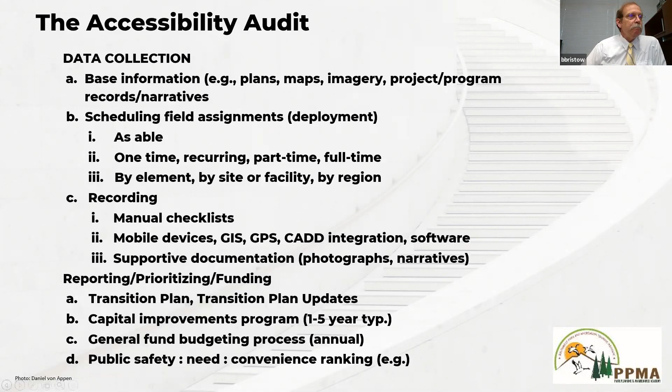Tools of the trade. This may be review for a lot of you, but maybe I can offer a few ideas that are new. I don't know.

A measuring tape, a metal straight edge - I like having a metal straight edge along with me on all my audits, especially when I'm the only one doing them. It's kind of like the old survey crews, which used to have 3 people: a rodman, an instrument person, and somebody taking field notes, but it's all one person now. If you're the only one doing an audit, it's good to have a rigid, straight metal edge with a measurement on it, like a yardstick, so you can lean it against whatever you're measuring and it'll stay up. It's kind of hard to do that with a measuring tape that wants to curl back in itself.

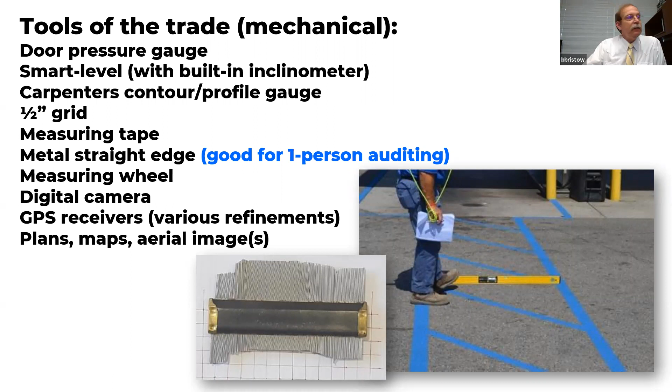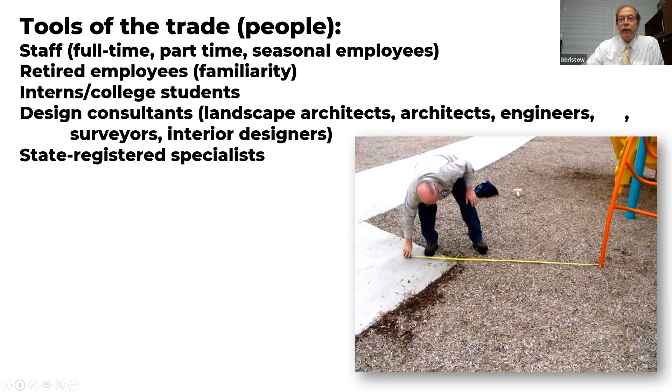As far as staff, can we use full-time people, part-time? Do we have a volunteer base to draw from? Do we have park interns? All these are legitimate forces that can be used in auditing. Auditing doesn't take a whole lot of training, but it does take the ability to have a keen eye, to put oneself in the place of somebody who's in a wheelchair or has another disability and think the way they do. That's the main thing in training, along with how to use the tools and the ways of gathering and recording data. Can you use retired employees? Sometimes they'll come back and help out. Finally, you can use consultants in the private sector and state-registered specialists if your particular state has that license.

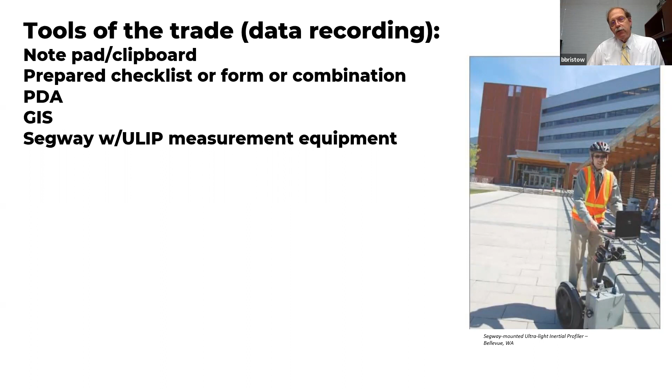There are some other items, just the tag-alongs you have, like notepads and so forth. This picture shows a city of Bellevue, Washington staff person riding on a Segway. This is definitely the apex of auditing - they use it for auditing their sidewalk systems, walkways, and trails. It has a built-in profiler, all digital, that feeds information to a computer, measuring slope, width, surface irregularities, and a lot of information. That's really for the forces that have a lot of money.

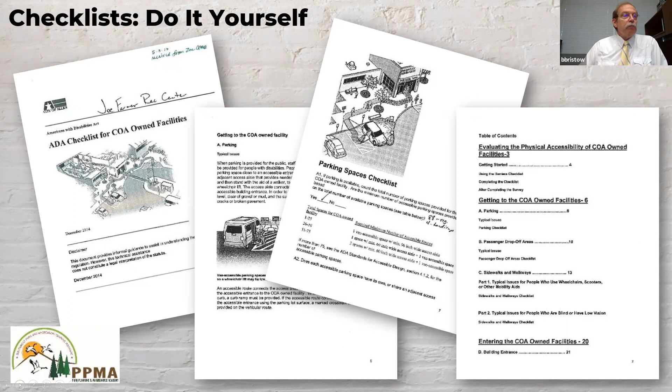I found one in California on the internet that I think is really good - it's the ADA cheat sheet. As mentioned, you'll get a copy of this presentation. I like this one just because I'm a visual person, and I like diagrams and dimension lines that show me in 2 dimensions what I'm going to be looking at or what I should look for. I think the Building in California group - I've included a resource link to their website - is a good example of a checklist that, although not interactive, is very thorough and easy to understand. It's a good one to look into as an example if you want to update your own checklist or auditing procedures.

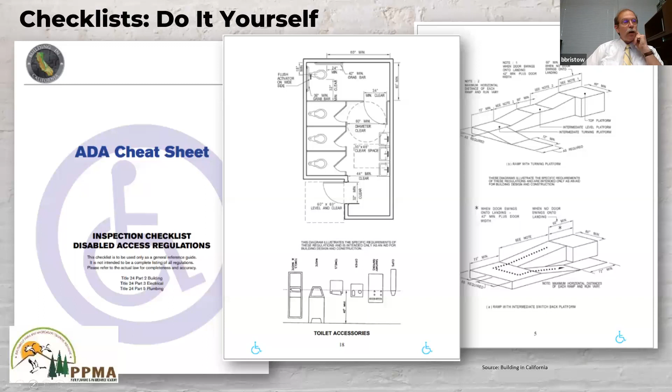There's another resource put out by the Institute for Human-Centered Design. These are copyrighted documents, but they make it clear on their website that you can use and reproduce them as long as you don't charge for them. They're a very good asset for auditing.

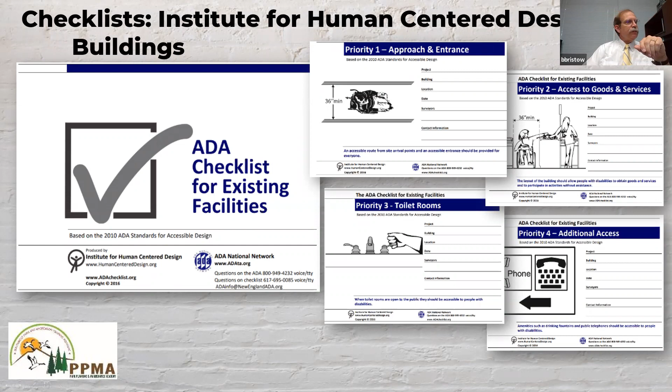They're very thorough, and the main one is the checklist for existing facilities. On the left side, the checklist library they've developed is broken into different sections, called priority sections. They've also developed a set for recreational facilities.

If you go to their website, these are available to download, print, and use. I like them. I think they're a good start in terms of the information you use to audit, what you record, and how it's organized. Organization is a big key to auditing and recording, as you know if you've done it.

It also allows you to put photographs into the auditing checklist forms, and gives you diagrams out of the ADA standards with an explanation of the dimensional, technical, and scoping requirements—scoping being what we're auditing, how many are required, and what is required. The technical requirements like dimensional qualities and clearances are pretty well covered too.

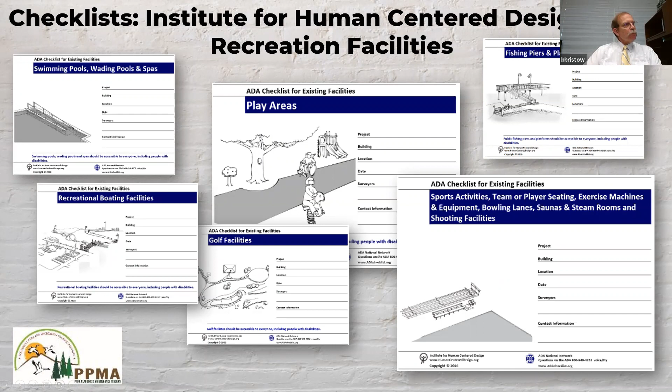The checklist that, to me—I wouldn't call it perfect, nothing's perfect—but the checklist I'd like to have when I'm out auditing, and that we'll probably develop when we update ours for the next transition plan update, is one that prompts the person or user to investigate.

I wouldn't say it inspires them, but it prompts and motivates them on what to look for, and may encourage them to think like a disabled person. It clearly tells them what to investigate, either through diagrammatic explanation or short verbiage—long narratives can be cumbersome and time-consuming in the field. Training can take care of a lot of that pre-audit work, though, and lessen the need for that.

Personally, I'd like to see a map in our checklists—something like a site plan or floor plan for whatever I'm auditing, that allows me to pre-plan, follow along while auditing, trace my steps, and use it afterward to reorient myself if needed. As you'll see in one of the facilities I'll show later, it can be easy to get distracted or lost auditing a complex facility with many moving parts. A map or reference to keep with you is a really good tool.

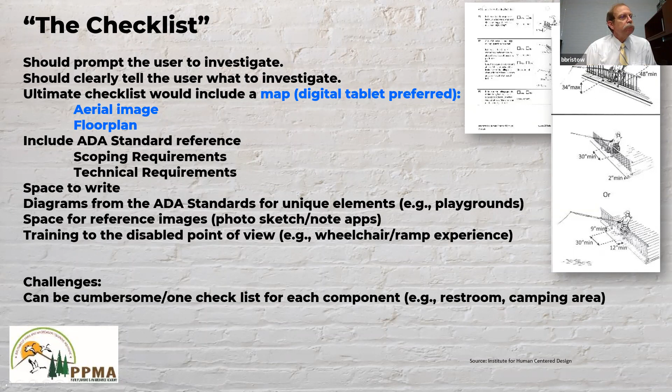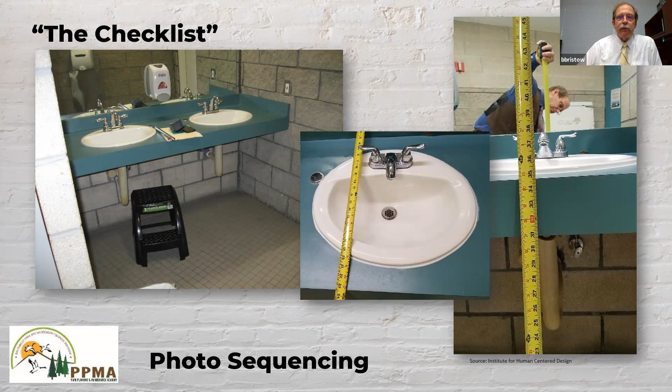Photo sequencing to me is important. Taking photos is, in my opinion, the greatest tool or help in conducting a successful audit. One tip I'd give is, when taking photos, I always start out every time I get into a component of a facility or park by taking a setting photograph. Here I'm dealing with lavatories in a dressing room. I take the setting and then break it into detailed parts. The setting shows me the overall picture, and then I get to work measuring the various tolerances, clearances, positioning, components, movable or operable parts, and so forth. I break it down into detail after establishing the setting, and it always helps me come back to that and double check my work.

We'll talk a little bit about going from checklists to high tech. We're not there yet. Just recently I talked to our own IT department about taking CAD files from various facilities where we have them—some of our buildings were drafted back in the old lead pencil on vellum days or ink drawings. Where we do have CAD files, I want to work out with our IT department, and you may as well if you haven't already, how to integrate CAD files into our GIS platform and use ArcGIS to combine that information. When we take notes in the field and dump them into the system, it combines them into a very useful tool that shows the layout of the environment we're working in, and also highlights and records areas of concern from our audit. It keeps that data safe, and it can be updated easily without paper, without pen. It's a beautiful thing—we're not there yet. If you are, maybe we can hear from you at the end of this presentation.

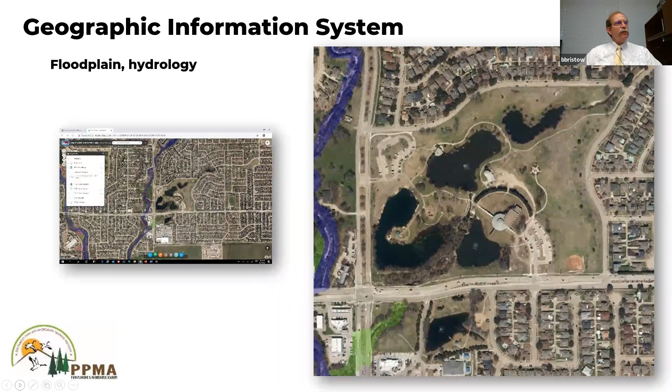We have a GIS system here at the City of Allen, and it allows us to go into various properties that we have, like parks—this is one of our community parks. You can see here the various levels of information that our system has. It's very common, and you may already have a system that's like this or even better than ours, but it shows a lot of information, overlays.

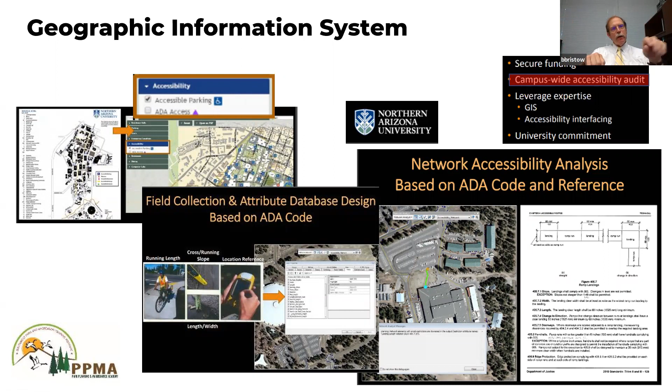One particularly impressive group that I was able to become acquainted with was Northern Arizona University. I've listed their link at the end of this presentation, and I encourage you to go look at what they've done. They've done a very good job of updating their mapping from PDF files to very interactive and integrated digital mapping. They've developed their own applications for field use and tied that to their mapping and capital improvements database. They've done what they call a campus-wide audit for ADA, and it's quite impressive. You can see in the bottom right hand a screenshot of how they integrate the code standards with visuals of the project area, highlighting the specific areas on the site where attention needs to be placed.

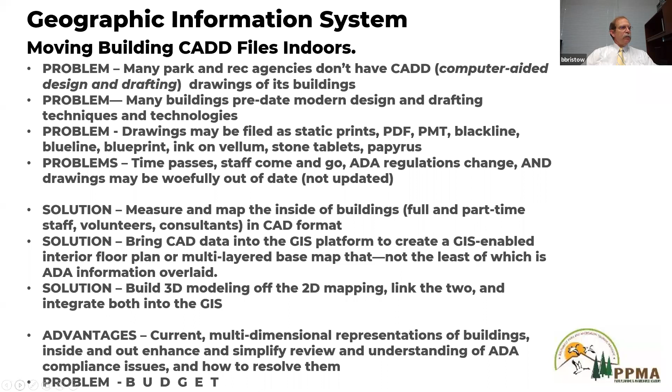I'm not going to spend a lot of time here, because hopefully at some point in the future, maybe we've moved on and everything will be on CAD and the files will be moved indoors, so to speak. You can take a look at this slide later. Just know there are challenges and problems to doing so, not the least of which is our budgets that we have to work with. Hopefully you develop a good relationship with your IT departments if you have one, but even if you can't, there's ways to improve our simpler systems and improve what we're doing even there.

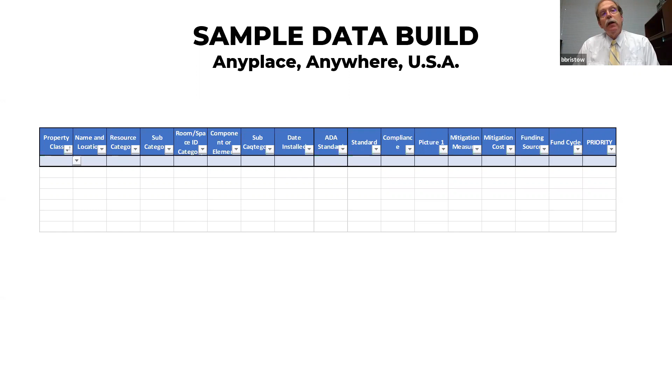What cycle are they on—are they in a 5-year CIP, or what fiscal year might they possibly happen in? And what are your priorities? Where does it stand in the overall bulk of your other projects in your database?

Data collection—what is what? Let's take a look at data collection from the viewpoint of three different types of facilities: one is a recreation center, another is a park, and another is a historic house. I saw a lot of different types of professionals getting ready to attend this today, so I've been trying to include views toward different facilities or sites that would be of interest to everybody. Hopefully I've met that challenge—I challenged myself to do that, and we'll see how it goes.

I'm first going to talk about a recreation center. This is one I'm familiar with, here where I work. It was built in 1996, opened in 1997, and as you can see, it's an interesting piece of architecture. It was built when our city only had 20 to 30,000 people—we now have over 110,000—so it's been outgrown for quite some time, and you'll see the architecture and interior finishes are kind of dated. It has a gym, racquetball courts, a running track, fitness equipment, a couple of meeting rooms and classrooms, and an outdoor amphitheater.

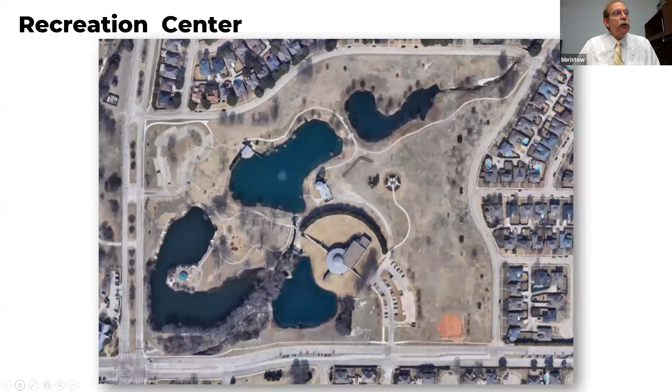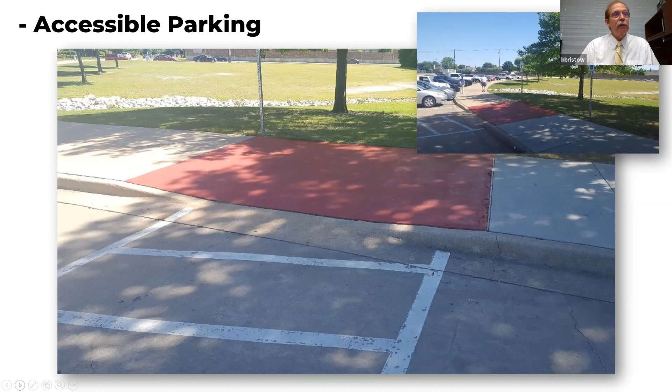I like to start where I park my car. I'll start looking at the parking lot where I'm able to park. Is it accessible? Do they provide a ramp that greets me with different color or textured pavement to let me know what transition I'm making from a vehicular setting to a pedestrian setting? Is the access aisle the proper width? Is there the proper amount of parking spaces for the total lot count?

Is there enough van accessible parking? I'm going to go from this area here where I just parked my car, into the North Sky Bridge into the facility to the control desk, and then take you through it. Over here on the left, you'll be entertained by the ramp.

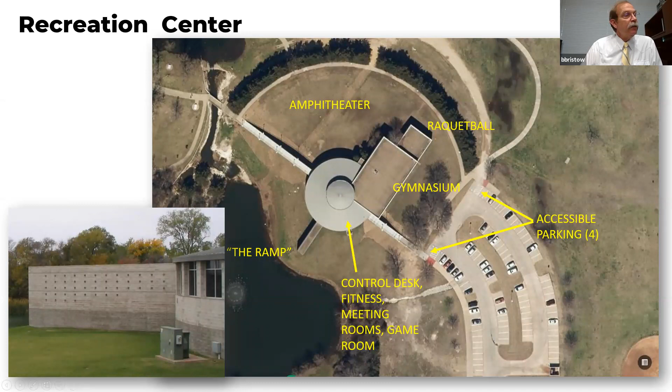Okay, I get to the front door. I'm going to check the door openers on the front doors because there's automatic openers. Are the buttons positioned right? Are they accessible? Are the clearances okay? Does the accessible door open and shut in the proper amount of time according to ADA and what the standard allows? In other words, it's not going to close back on me, is it? I certainly hope not.

Anyway, inside the lobby, I look again at the buttons. How high are they? Where are they positioned in relation to other wall features in the vestibule? What are the doorways like in the facility? What kind of door hardware do they have? Are they movable handles? Are they twistable knobs? Are they panic bars? I take note of that.

I photo document it. The restroom doors often exteriorly have a fixed bar type of handle. I look at thresholds, and here we have a good example of a compliant threshold that's low profile and durable.

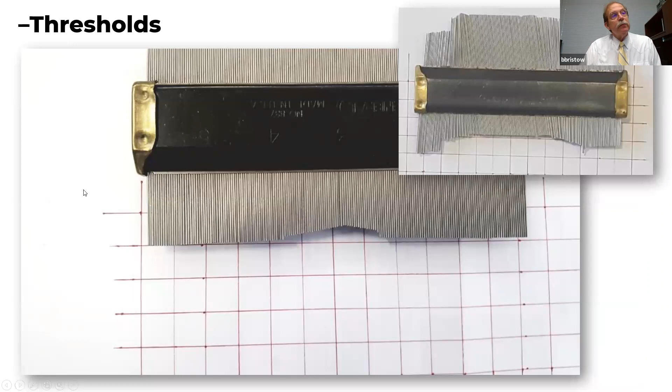I use that Carpenter's profiler to take an imprint of thresholds for me when I'm going through an audit, and I overlay that once I've taken an impression to tell me whether or not it's compliant. ADA requires that a threshold be 1/2 inch or less. It can be 1/2 inch if half of that height is beveled. If it's only a squared-up vertical face on it, it can be up to 1/4 inch. So this helps me quickly determine whether a threshold is compliant.

Here's the lobby, the upper floor lobby. Is that counter within the height range? Most of our counters are 34 inches, which is compliant.

We have a gym in this facility with a jogging track around the upper floor. You see some bleachers down there in the lower background. These have been fitted or designed for wheelchair and companion seating. There's probably better examples of these nowadays. These are already almost 30 years old, and they kind of call attention to themselves, don't they?

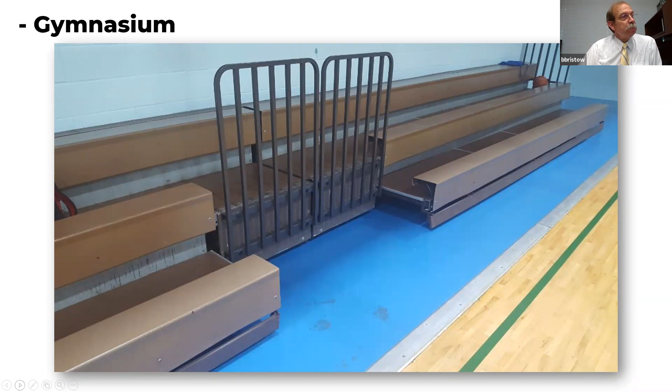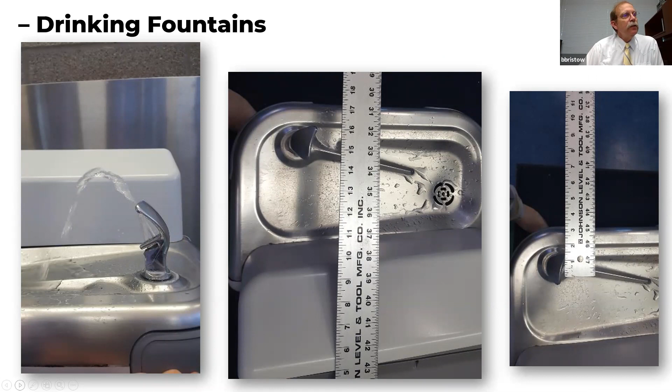So here's a situation where I dinged us, for lack of a better term. Drinking fountains are complex in their own right in terms of stream dimensions and heights and strength of the water stream. In addition to that, the position of the spout and so forth.

We have vending machines. Are the points at which the user puts in their money or makes their selection within the reach range if they have to come up to the machine from a face-forward position or from the side? Those reach ranges are very important to consider here. And not all vending machines these days are still designed to be accessible.

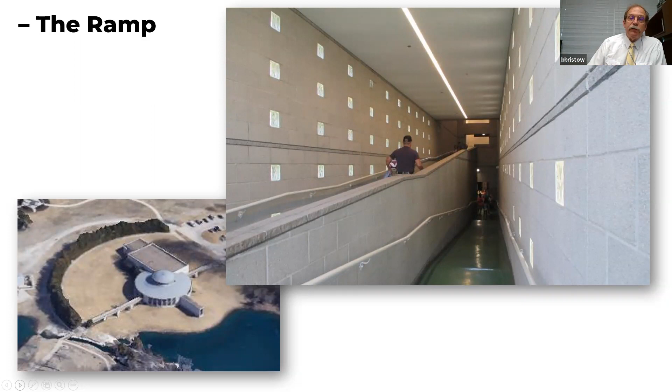And I believe we had a little housecleaning to do after I went through there. It was a little bit tight that day.

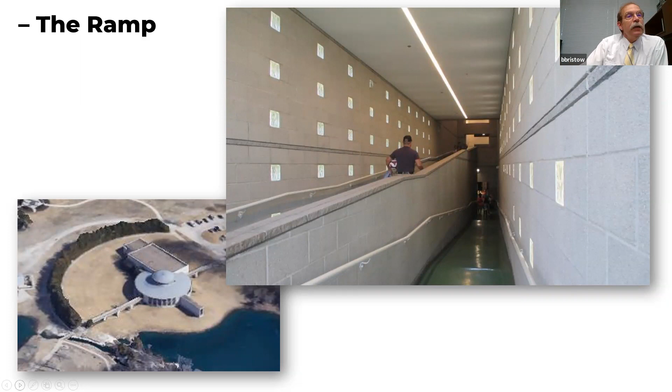Here's the ramp. As you can see, it's just an amazing feature, isn't it? It goes over a vertical height of about one story, 10 feet. And it's an expensive feature. It does comply in most considerations. Here's just a palette of different measurements I took.

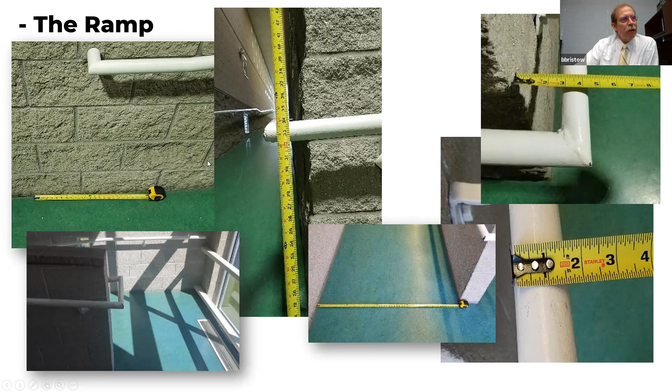I think the most suspicious one I wanted to find out about was the provision of landings. Since it goes such a high vertical distance, it's going to have several landings along that route. It's kind of easy to see where the landing is in that top left-hand photograph, where the slope against the brick line turns into a level line. At the point where the landing ends, is there a 12-inch level projection of the railing at that point? I think there was that day. Anyway, you can see the many measurements you have to take in that.

There's a beautiful view out the turning point in the railing. You don't have to always put a projecting 12-inch, by the way, in a situation on these ramps. There are conditions where you do and you don't.

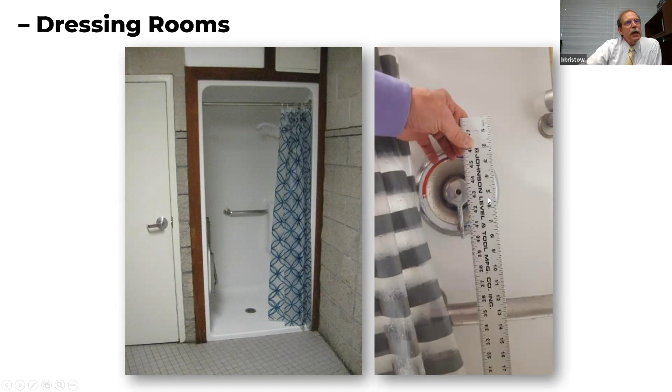The shower, as you can tell here, is not a roll-in one. However, there is a shower room next door. I didn't go into it—there were people using it, so I'll have to reschedule on that visit. But measurements such as the heights of movable parts and things like that in the various components of the dressing room. Typically, benches have to be fixed to the floor and have a backrest.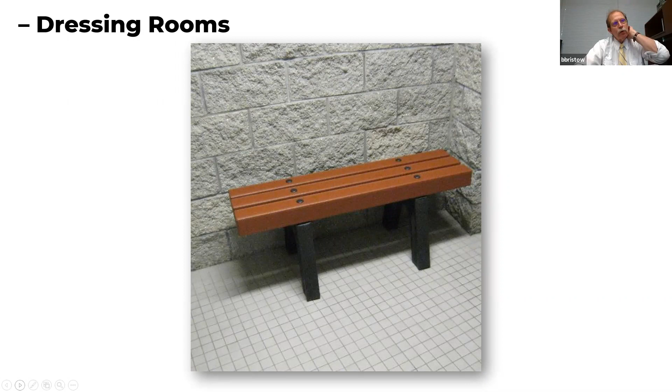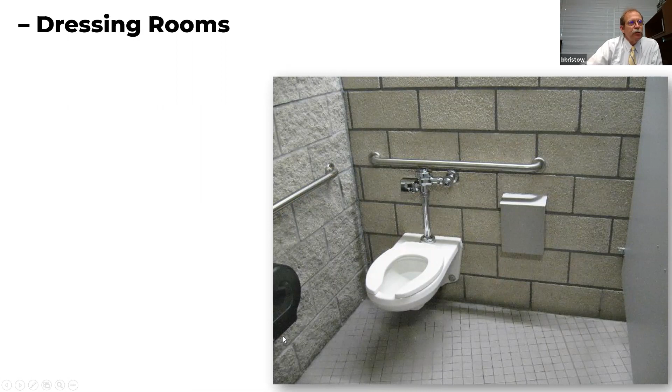Toilet compartments—I'm always wanting to see the grab bars, where they are, how high they are, the toilet, the height of the seat, the flushing mechanisms, the paper dispenser in relation to the front of the toilet, and the reach range considered there, things like that.

Is the door hardware accessible and easy to use for somebody with perhaps hand or wrist difficulties or disabilities? Coat hangers—are they mounted at a height that's accessible? In this case, it was not. That can be easily remedied.

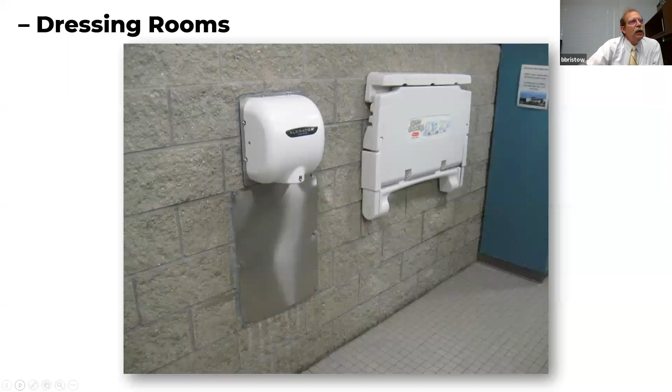What's the position of hand dryers and baby changing stations? Like I said, I like to take a setting photo of groups of items I can put in one group photo as a reference. I believe those were insulated pipes under there. Hot water pipes have to be insulated so people don't scald themselves or burn themselves.

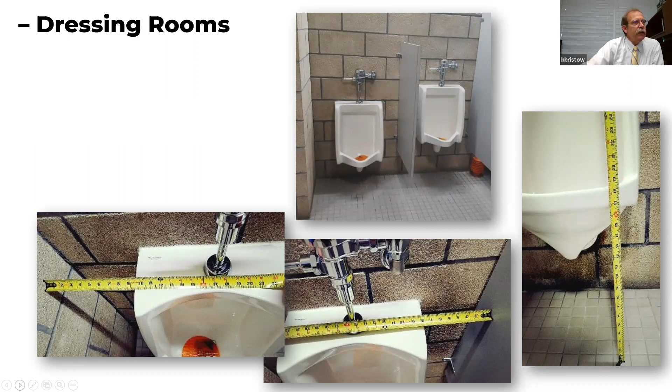Urinals are always a concern in the men's room. Are the spacing and mounting heights adhered to? Toilet distances from walls—are they centered in a space? Is there enough lateral room side to side?

Your signage—does it have braille? Does it have adequate relief, typographic characters, and so forth?

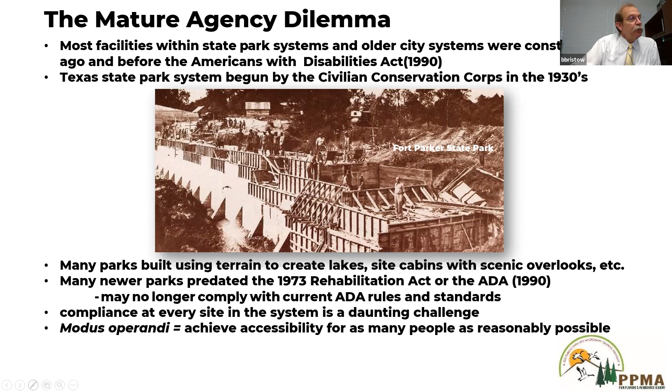Those facilities, if they have a historic designation as a registered Texas historic landmark, they are protected and can only be altered in certain circumstances.

Anyway, I'm proud to say that the Texas Parks and Wildlife has an ADA branch, and Sandra Heath, who I've talked with briefly recently, I believe is over that branch, and they monitor the ADA. As an agency that's been around since active volcanoes were still in Texas, almost—I'm being facetious, of course, but they've been around for a long, long time.

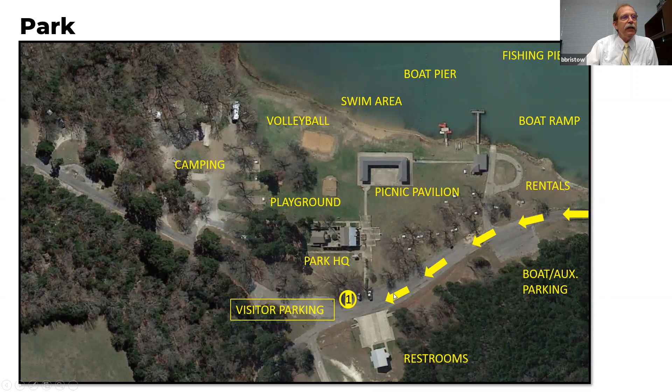It's divided up with a headquarters building, a very beautiful headquarters building and picnic pavilion, an interesting rentals and concessions building, with many of your other basic state park facilities, camping, sports, water features, and water activity areas. So let's quickly go through now, and I'll show you where I went.

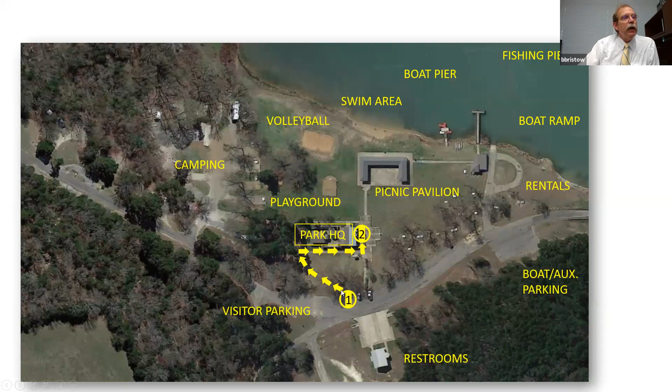I parked at the parking lot and quickly went up their ramp to their headquarters building. It was when I got onto the main sidewalk that I chose a route that allowed me to take a ramp to the headquarters building. I took that ramp—the other route directly to the building is a very steep slope, but this allowed me to take a comfortable walk down to that level and then get to the headquarters building.

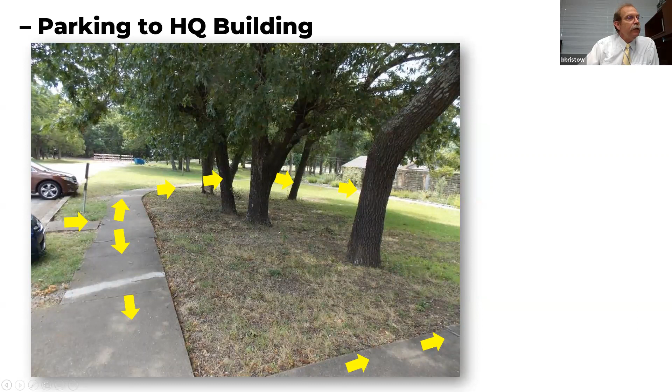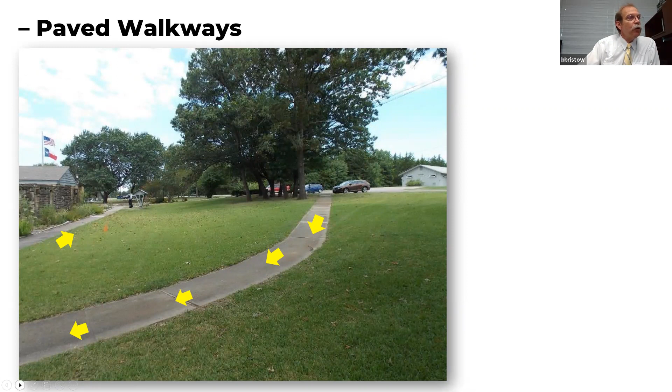There's that steep slope that many state parks have. Here's the sloped access route to the headquarters. I went to the headquarters building itself. I think one thing I wanted to show you here was the hillside—you can see it, while it's not a cliff by any means, it's pretty darn steep.

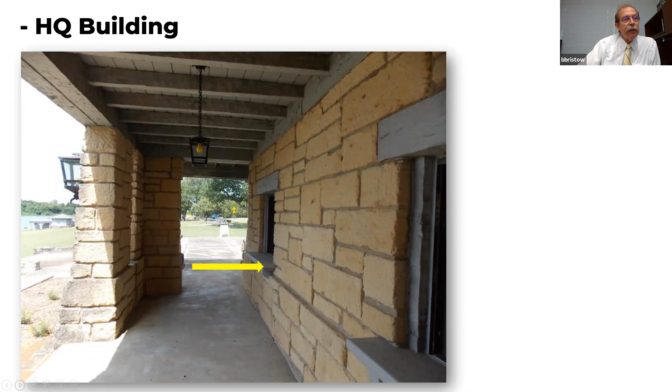The headquarters building has plenty of clearance around it. The counters looked okay to me. So I proceeded on my way to this beautiful CCC-built picnic pavilion. Here you see a better view of the ramp down to the picnic pavilion at this particular park.

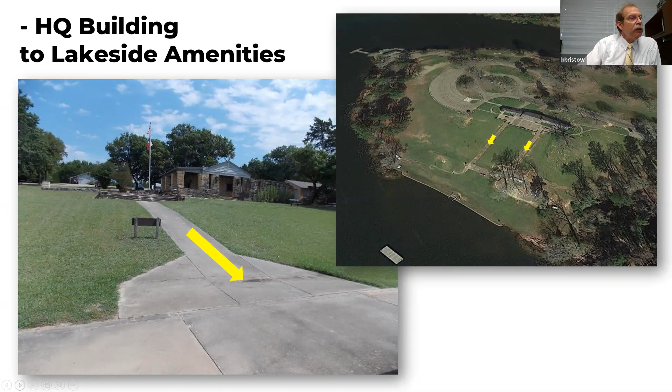This is Daingerfield Park, my favorite park of all Texas parks because I grew up going there. They likewise have a very similar situation with two access ways down to the beach and swimming area. Really challenging how to deal with.

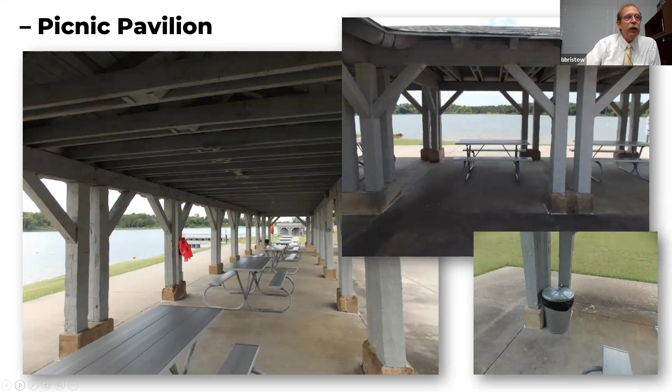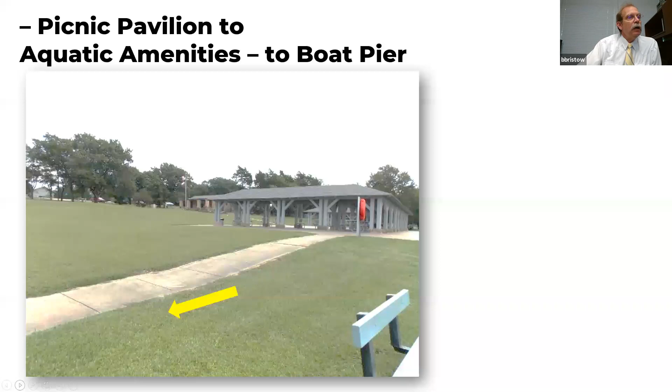The picnic pavilion at this park is very interesting architecturally. I was looking for things like ADA accessible tables, garbage cans, things within reach range for people in wheelchairs. I then went quickly to the boat pier. I followed this route. Here's the boat pier, and of course you can see it ideally should be connected to an accessible route nearby. It very easily can be, it's just a matter of planning and programming it.

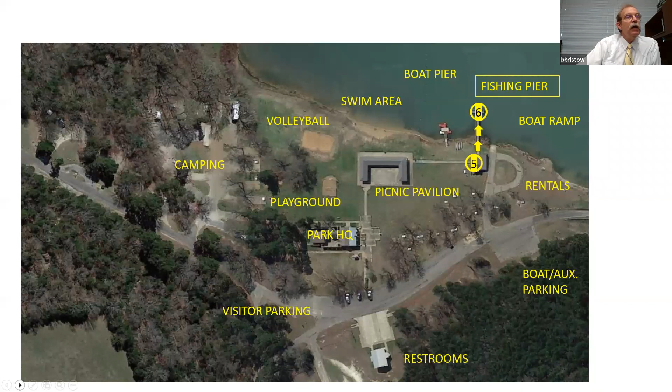Then I went to the fishing pier. This pier at this park has a way to give and take with high water and low water. If this gets to be too steep, there is an issue. If the water's high, it's not so much an issue. And the railing, if it is steep, would ideally be modified in this ramp area with edge protection and an ADA grab bar type rail.

There's a look back at the concessions. The pier itself, at some point, to accommodate wheelchairs, would include at least one position where the wheelchair person can get up closer to the water with a bulged out railing, a lower railing at the top.

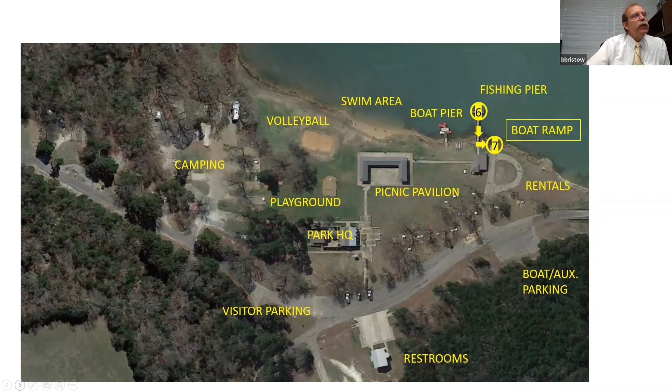Then I went to the boat ramp. How do you make a boat ramp accessible? I don't know. Maybe what could happen here, if there's ever a need or a cry for it, would be paving in one of these areas where once the boat's in the water, it can pull up to that bulkhead there, and someone could get in and be helped into a boat.

Then I went to the swimming area. Swimming areas are not really used a lot right now. I looked at signage. I then went to the volleyball and the playground areas. Horseshoes were there.

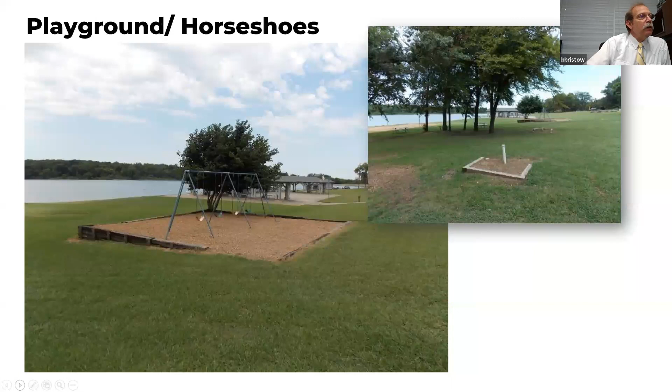Then I went to the camping area where there's camping spaces with a beautiful view of the lake. There's camping spaces that are otherwise nestled among the trees and so forth. The challenge here is with some minor modifications, making a number of these spaces in the park accessible, and do that fairly simply, I think, by just adjusting the grade or the paving material in the table area, and make maybe one of each type or experience of camping space accessible.

Sandra Heath, when she and I talked the other day, told me about handles on some of these jug fill stations at the campsites, and experiences had it with TPWD at some of their parks, with ADA compliant spigot handles being the blade type, and how now deer have actually manipulated them and turned the water on. And of course, they're not going to be too diligent about turning the water off when they leave.

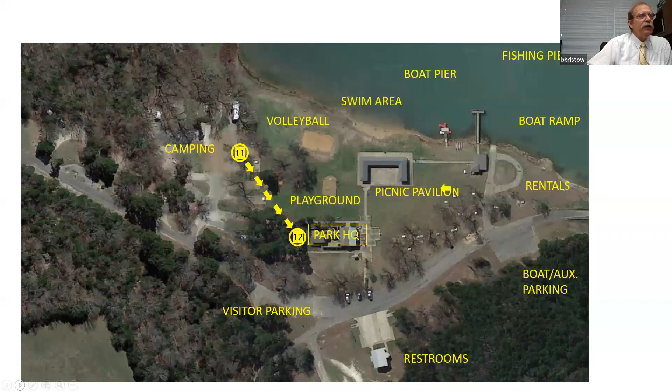Road surfaces, are they firm and stable for wheelchair and accessible use? This signage and posting here, I haven't seen anything yet that addresses this. Maybe you have from an accessibility standpoint. I would think at most they could be modified slightly on these camping spaces that are modified to be accessible. I then went back to headquarters.

They have a beautiful pollinator garden there for the monarch butterfly. I commend them and salute them for that. That's really a neat feature to see in our parks nowadays.

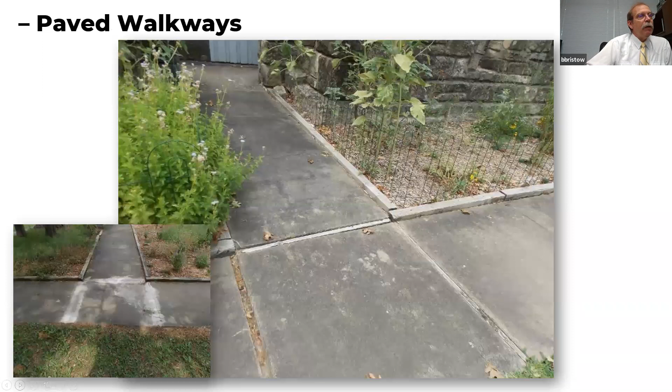Typical and old pavement, even here at where I work, you see joints where the pavement's expanded or differentially settled between panels of pavement. Minor repairs on situations like that are very common anytime you're at a site or a park or a facility where the pavement's old and you have our Texas expansive clay soils.

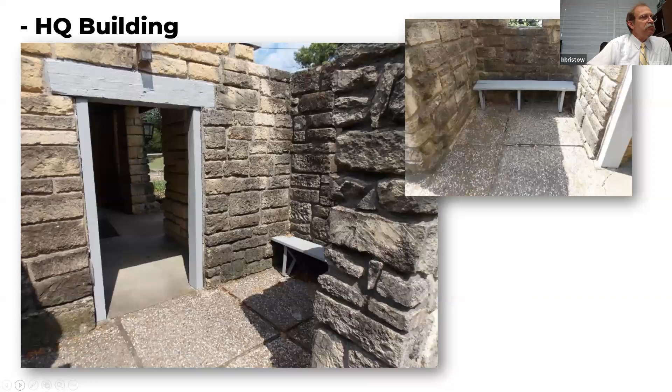There's the pollinator garden again. The headquarters building is very unique, it looks like it was attempted to mimic a ruin or an old fort perhaps, with nooks and crannies and so forth. Bench seating, maybe one of those could become a shorter bench with an opportunity for seating by somebody in a wheelchair, a very simple modification.

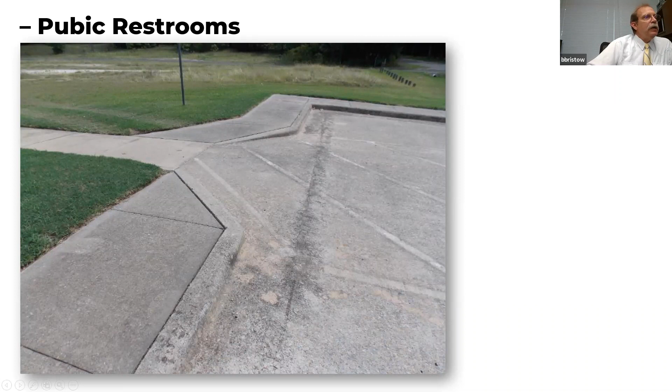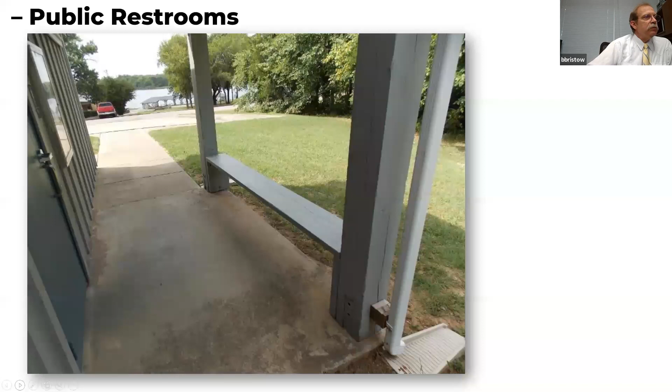Seating, again, maybe the bench could be shortened to allow some paved seating for somebody in a wheelchair outside the restroom. A minor thing. Looks like there's sufficient width for signage displayed on the latch side of the door for somebody wanting to enter, and it does have a grab-type handle, easy to use.

And then I went to the picnic area, same thing with the campsites, could be easily modified to make them accessible by removing slopes and different elevations along the pathway, with an accessible path to one or two tables in each area. And then I left, okay?

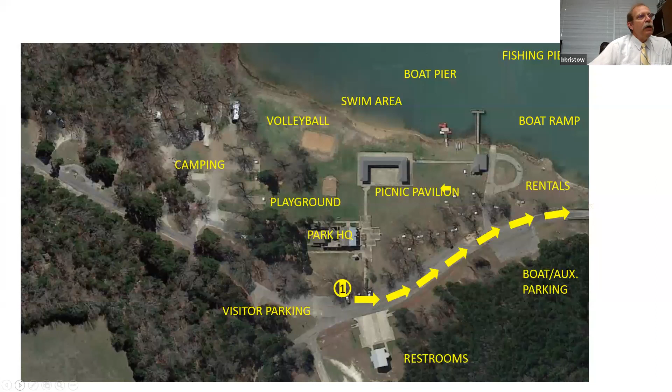I want to talk a little bit about a historic property that I've been looking at. This one is in Texas, a house built in the early 1900s. The one thing about it, and you'll see, it's a beautiful house. They've done a great job of restoring it, building it, making it into a public museum. It is two-story, recognized by the Texas Historical Commission, but it does not have status as a recorded Texas historic landmark.

It has what we call a subject marker, put out by the THC, the Historical Commission, which really only tells the story of the property and how it was pioneered, how it's been preserved or restored, and how it's been handed to the public agency that now manages it. It has to be a recorded Texas historic landmark, at least in Texas, and maybe it's that way in other states as well.

But the state really regulates the protection of historic properties, and if they're not recorded, they are subject to having to comply at various levels to the ADA, or in our state, the Texas Accessibility Standards. So there's different levels of recognition by the state agency and whether or not they are protected.

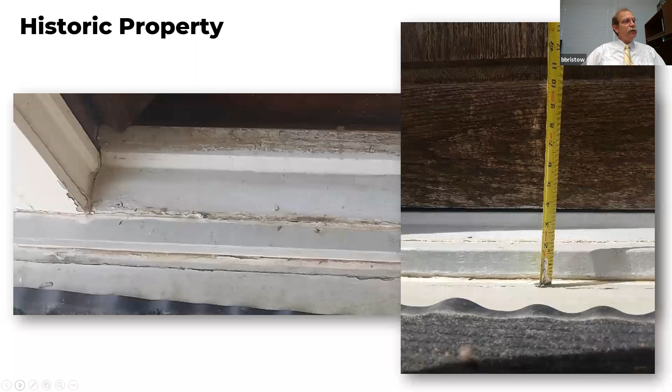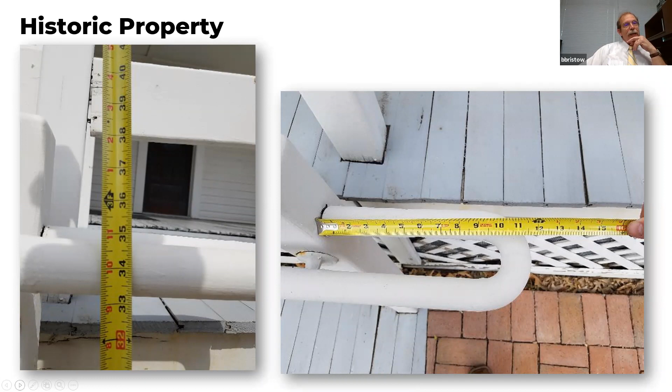I looked at the various portions of it. When you get to the top of the ramp, the door thresholds are the real challenges, as they are on many historic properties. The hand railing at the bottom of the ramp was extended appropriately, as you see in the right-hand photograph. At the bottom of the ramp, here at the top of the ramp, it was not extended at either of those post locations, the 12-inch.

At the top landing of the ramp, you'll notice some of the timber is tongue and groove, so it's going to rot quicker than butt-to-butt joint lumber. Some of it's settled, perhaps. There's a difference in elevation here of more than a half inch, so that's a problem that needs to be accounted for and remedied.

Once you're into the house, this is where you enter from the ramp into the back of the house. You can see the hardware—they've tried to keep historic hardware in this facility. Something will have to be done with the thresholds; they'll have to be lowered and modified to get from the ramp into the room at the back of the house, the entry for accessibility.

Also, the placement of some of the furniture interferes with the ability to reach the hardware to open and close the door from the inside. The hardware—traditionally glass knobs like this, which require a person to twist their hand or wrist—is not compliant.

The agency that manages this property would probably want to ask for a variance on that. They might defend it by saying they have staff on site all the time during tours, and the door can be left open or opened and shut for people. They might have a buzzer outside or another way to circumvent that compliance point.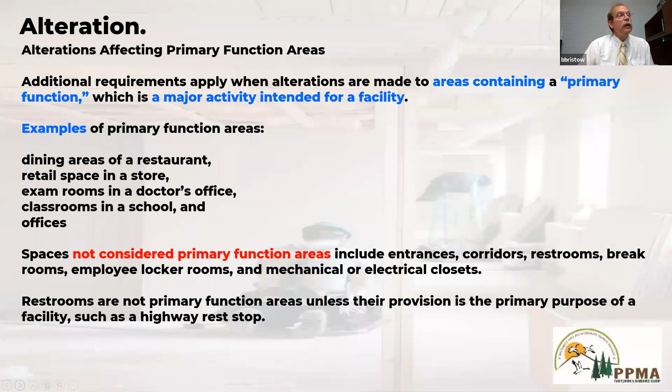Here at the end of the presentation, I wanted to give you some resources to take away and some terminology that may be useful, which I'll go through quickly. You don't have to look at the whole slide, but these are key terms I covered today, or that you may want to review and refresh your memory on, shown in red. I've gone through definitions of these on several slides, and I've tried to include graphics that may help cement the concepts if you study them.

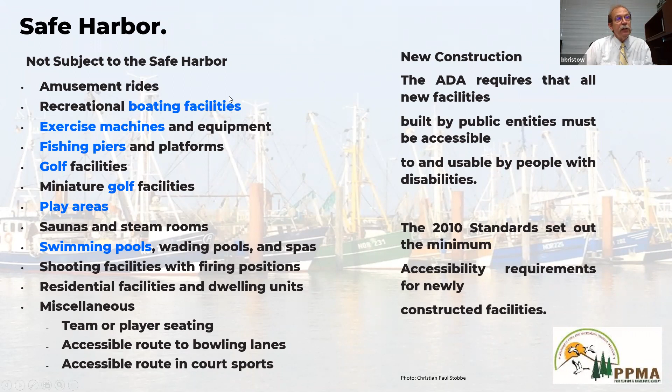Safe harbor is a term that sometimes throws people—and what is excluded, amazingly, a lot of our world is excluded in terms of safe harbor. A lot of the guidelines and standards dealing with recreation and ADA were not developed until the last 10 years.

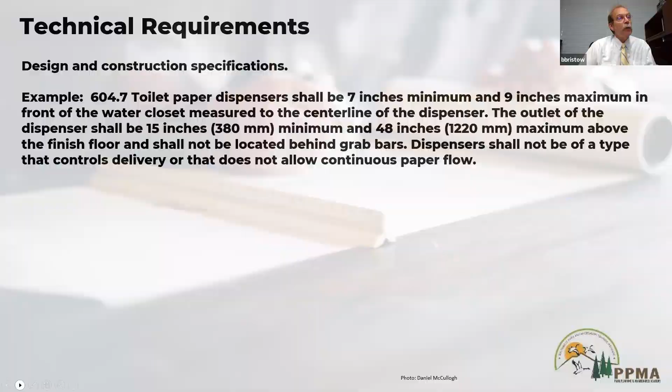Scoping, technical and feasibility issues, and requirements—undue burden is a term you'll want to familiarize yourself with, one you can use to describe your situation when requesting a variance or citing a hardship or burden, if you ever get nailed with that kind of situation.

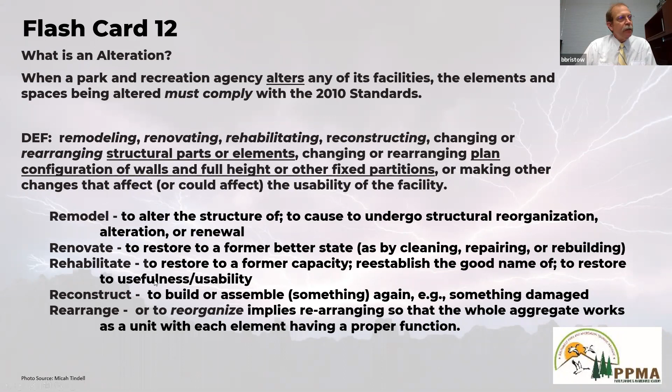I went to my dictionary and really tried to pull together ways to describe alterations in ways we can relate to easily in our common everyday dialogues. And like I said, there's 14 or 15 of these things.